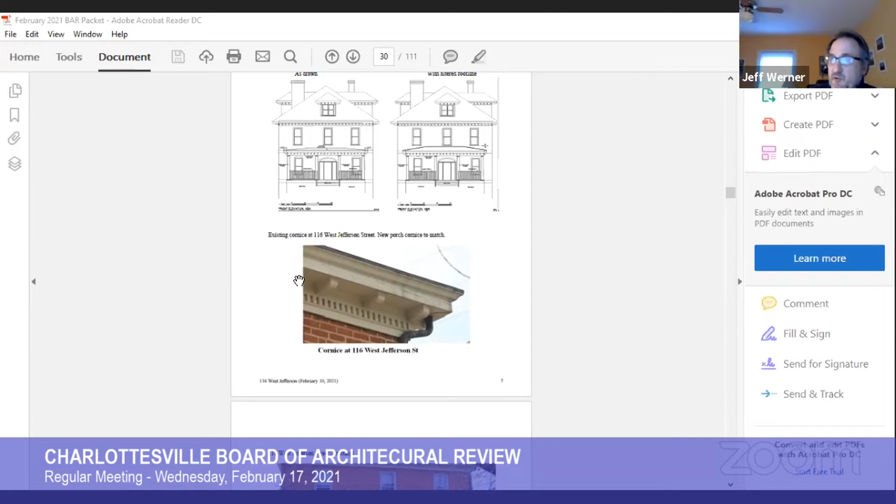Sorry to jump in, but I was just going to walk down through the staff report item by item. Did you want me to jump in now, Jeff? Yes, and I apologize, I didn't add the drawings, but I'm going to send it to Robert so he can put them up there. Is now an appropriate time, or should we wait till discussion? Well, I was just going to walk down through the staff report. Why don't you go ahead then, Jeff? Finish your presentation, or your staff report.

Well, I was basically saying, as far as the discussion goes, if this helps you all, is to work down through it. I know in some of these staff reports there are things like paint color to be determined, flooring material to be determined. This offers a checklist for your conversation with Gordon. That's all I meant, and I just started at the columns at the top.

So when we say, is Gordon okay with these things, there are still a few things here that have some question marks on. And to be clear, Jeff, I see you've got everything illustrated - are these illustrations all tied to one of your discussion points up in the text, or do we kind of need to look at both?

Yes and no, so let me try it this way. I know - stay right there on that image, Robert. So the Scamozzi Ionic - Scamozzi is simply, I don't know what the curls are, rotated at an angle. And in the old photograph there is some ornamentation, and you can see it in this image. This is simply an image I pulled offline.

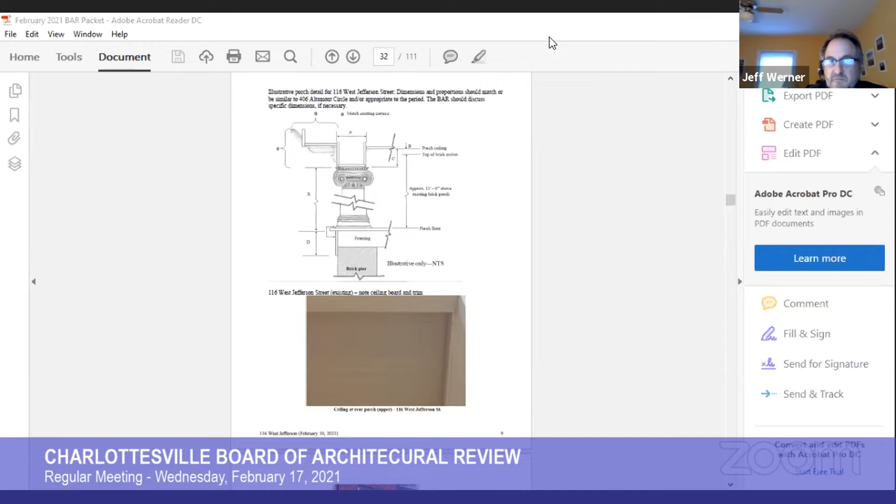Okay, just for sake of formality, are there any comments from the public? Please use the raise your hand feature or press star nine. I don't see any raised hands. Okay, all right, great. So yes, let's do as Jeff has said - let's go through this item by item and make sure we've got everything cleared up.

So yeah, you've got the cornice - they're going to match. I think... go ahead. Capitals - I would recommend that the capitals be a Scamozzi Ionic, similar to what is at the Altamont Circle example that we're looking at, or that I'm looking at.

And Mr. Johnson, you'll be limited to what is available out there on the market. Jeff, I expect, can help you with some of the possibilities for manufacturers that offer Scamozzi capitals, but it'll be your responsibility to match the Scamozzi capital so that it's similar in appearance to this, and also of the proper size for the column and the pilaster itself.

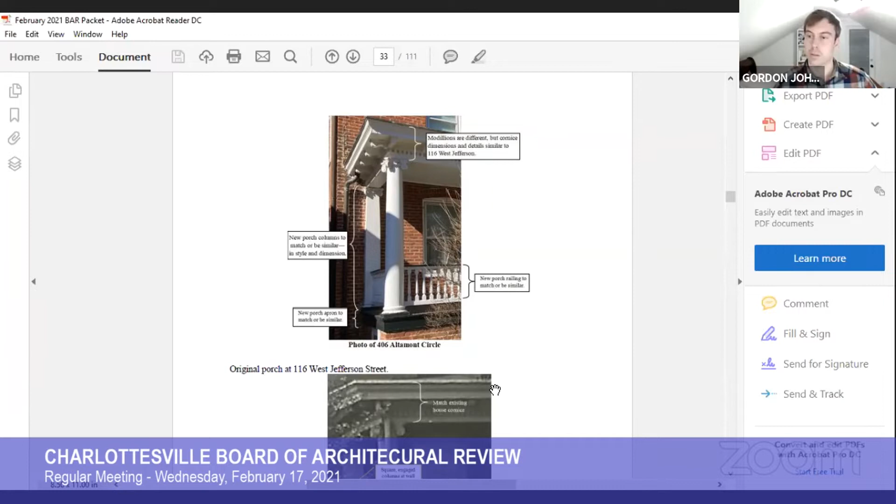Okay. And into that, I would recommend that once you find what you want to use, just give staff a copy of it, and we can leave that up to administrative approval. Okay, if the rest of the board agrees - does anyone have any concerns with that?

And Robert, I just emailed you something if you're able to - give me a sec. All right, this is just to express what we were talking about, not trying to reinvent the wheel. The columns that are on Altamont Circle have - there we go. Okay, so for example, there is the one that has the acanthus, and then go to the next one, Robert. This one simply has that band at the top - that seems to be sort of what's there.

So I think the idea was, at least in conversation with Jody, that there be some sort of ornament at the top, either of that band or with the acanthus leaves, but it just not be plain below the capital. So that's the question for the BAR.

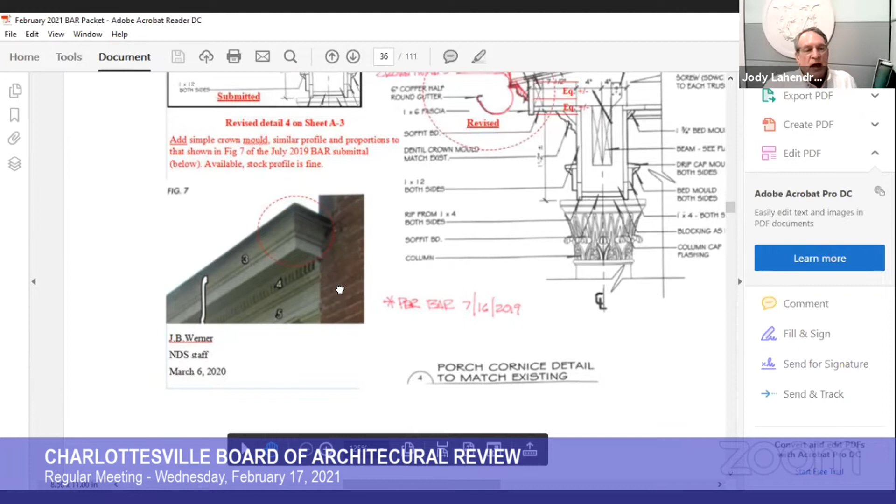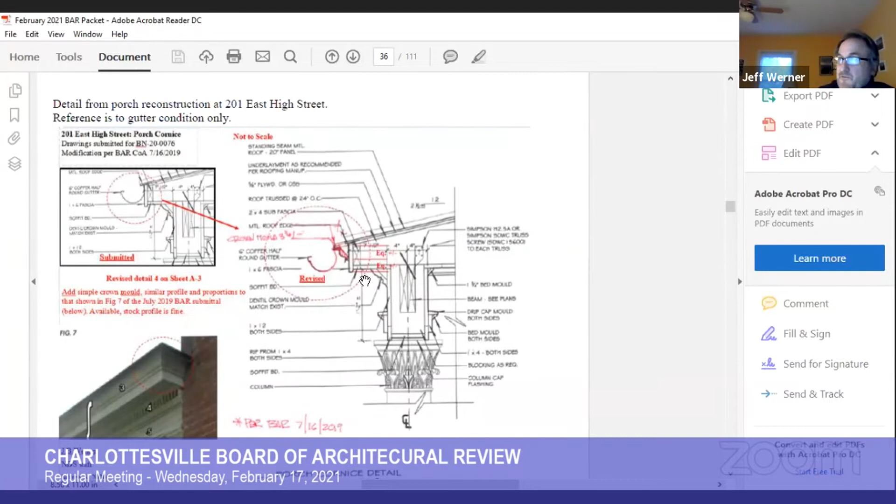The only thing we're referring to here is, don't look at the details, just look at the condition of that. The cornice of the front porch will be replicated, including that piece of crown. And if you go up, there's a rough sketch.

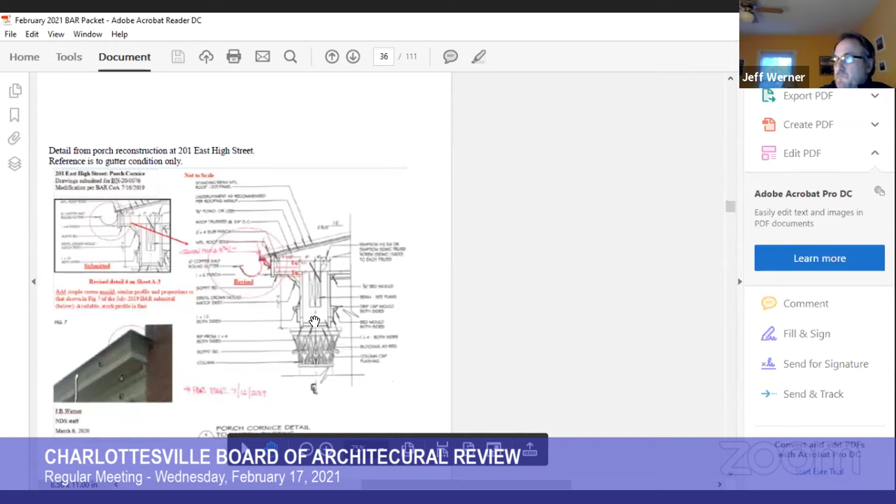Rough sketch photographs. If you go up to page 9, I roughly sketched the cornice and then I dropped it in, so you can see there it is right there.

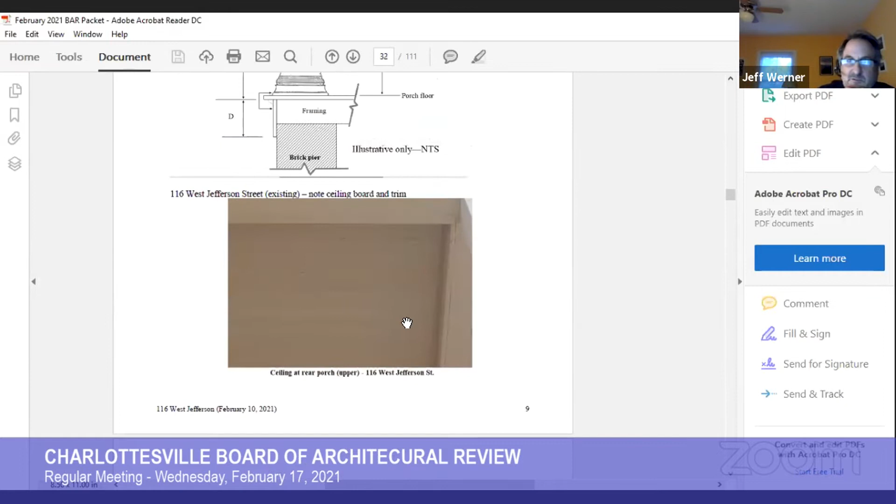Stop right there. So that's the cornice, approximately, that I sketched from the photographs. There's a piece of bed mold, there's the dentil, then you come up, there's a fascia piece with a kind of bed mold that wraps the modillions, and then it comes up to the front and there's another piece of fascia with the crown mold going up underneath the eave.

So in the condition here, replicating what you did at 201, it would look like that, and then the eave-mounted gutter would be suspended in front of that crown. So in fewer words, the goal is to rebuild the cornice as if the internal gutter were still there, but instead of doing the internal gutter, to tack a half round on at the end.

And that crown is matching the crown on the main roof, right? Well, yes, in my best estimate. As long as we say the whole cornice is matching the main roof, from the fascia against the building and the dentils all the way up to the crown beneath the standing seam, including the modillion blocks, all that's the same, and we're adding a half round gutter to it. In lieu of a built-in, right? That's perfect. Okay, good, I'm happy.

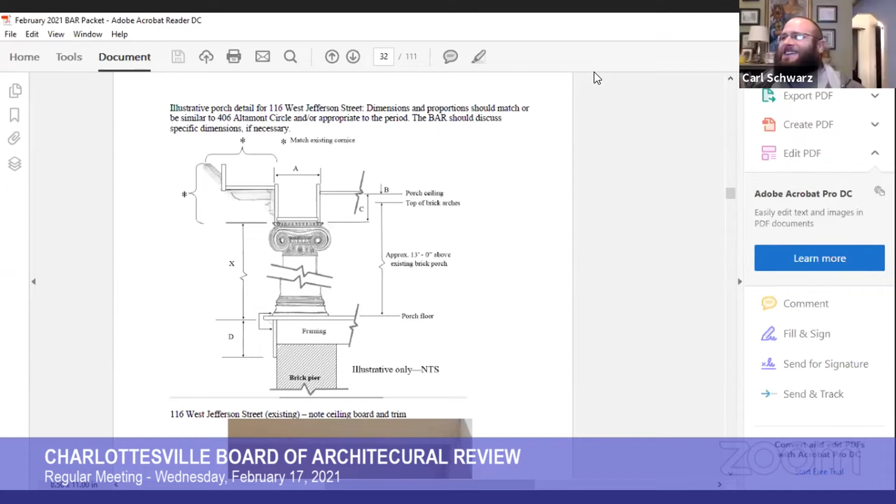Sorry. I have just one quick question, and I may have missed this, but with the upper roof, is that getting gutters on it now too? That currently has built-in gutters that are remaining, that we're not doing any work to. Got it.

So just for the record, and this is really more an opinion on my part, if it were my house and I did this similarly, because the rest of the house is like that, and this is sort of the premier element as you approach the house, my gut would be to remain with built-in gutters, but I'm not enforcing that. I'm just saying that would be preferred, given the quality of the house, to putting the half rounds, just because they've compromised the line of the eave there. But nobody's going to enforce that, I'm just saying that as an opinion.

And while I support that philosophically, practically, there's not a built-in gutter that doesn't leak pretty soon. I mean, we can't keep them from leaking here at the university, and we've got lots of resources. So there are practical reasons for someone not to do a built-in gutter. Yeah, no, I said it's not enforceable, I'm just saying that would be my preference.

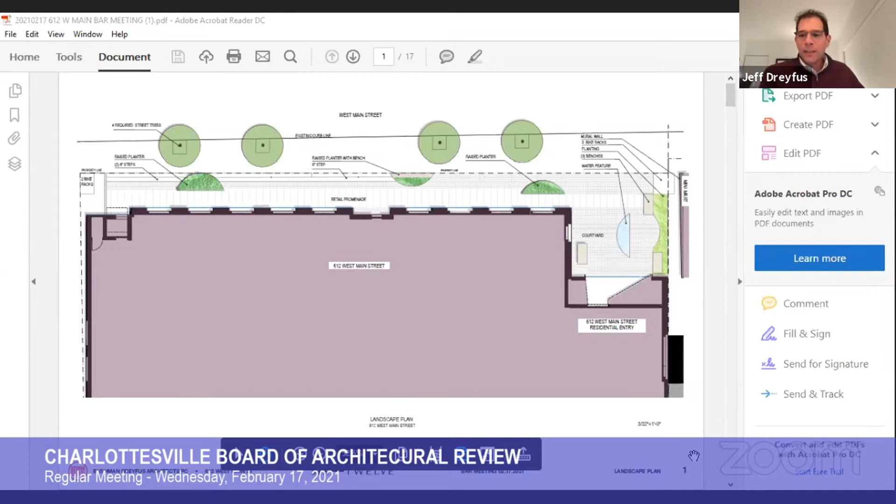Thanks everybody for having us back. We're not intending to wear you out, we're just intending to keep you informed and give you an opportunity to continue to give us guidance prior to coming to you for official approval. I think what I'd like to do early on is hand it over to Anne Pray, who is our landscape architect on the project. But to give you all a very quick overview, the questions that we sent are comments, any thoughts you all have, questions about the landscape and hardscape plan. The building design, the north elevation, the West Main Street elevation, really hasn't changed much from what you all saw two months ago. I'll talk a little bit about some of the modifications we're contemplating there, but then you'll also see both the west elevation and south elevations, so that we might get any input from you all on those as we continue to develop them. So given that, I turn it over to Anne, who might describe our intentions with the landscape and hardscape and how that's been fleshed out.

Thanks guys for giving us some time this evening to talk about the development of the plan since you last saw it. I want to speak about how we're trying to respond to earlier comments about creating pedestrian engagement and making the building more active at the street, while also breaking down the building mass to make it more pedestrian and human-scale friendly.

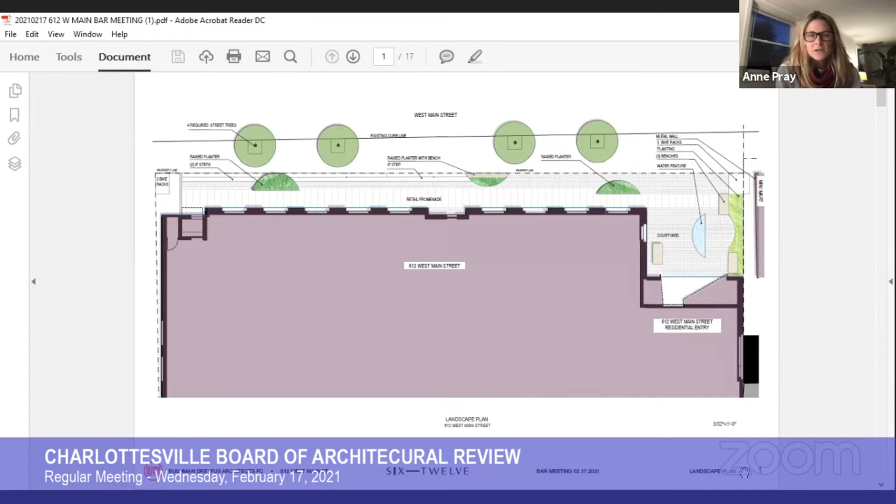This is the overlay plan. I apologize it's very light here, but there are 4 dashed pink circles outboard of the existing curb line.

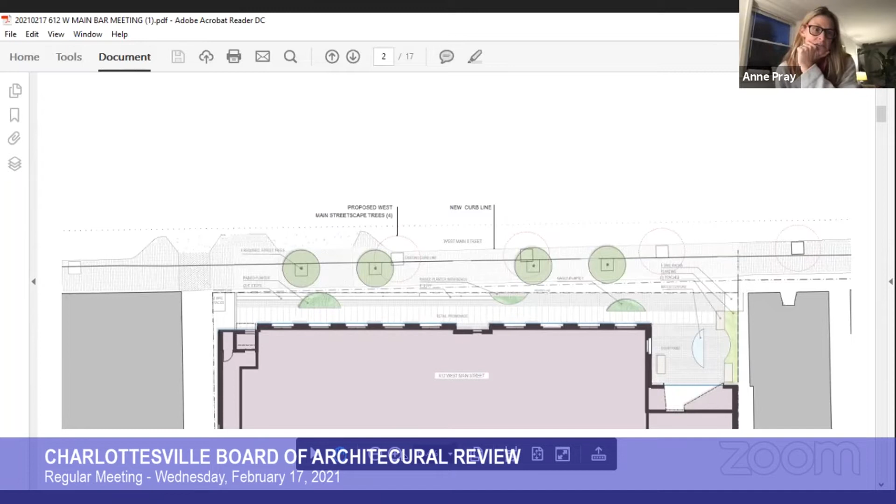Those are the proposed West Main Streetscape trees. In quantity, they work with what we've got and it would just be a matter of coordination. However, the curb line is nearly 2 feet outboard of where the existing curb line is right now on West Main, which lends us to believe they're redesigning the whole street, with parking and different curb lines and curb cuts. So the extent to which we're actually going to be able to negotiate that positioning is kind of unknown. I'd like to figure out exactly what the expectations are from the board as to how we're supposed to negotiate and handle that.

So here you can see an elevation. The streetscape trees, the 4 trees we're proposing, are really going to compete with the overall scale of the building. I think their placement works a little more symmetrically side to side, with each one centered on a major column of the building, whereas the planters themselves bring the scale down to the pedestrian and the body, and work a bit more to create density against the building and your own perception of it as you walk by.

As you look at it, you can see the courtyard space again to the left, where I show the water basin and these 2 stone benches. That's a much more open experience overall. Then as you walk by the first bay, or the first true building, the 4-bay, that's more broken up with the planters and the trees. Again a more open center, and a last third with a planter on the end, nodding back to the balance of the 4-bay building preceding it, with finally the open stair on the end and the retaining wall.

I think it's important to talk about the water. One of the things about this building, which gets a bit more toward the interior, is that it goes from this very rectilinear, clean facade outside, and as you move your way into the building it becomes a really calm, curvilinear, meditative experience. I think what we're trying to do by introducing water is introduce just a small sound, a small nod to, you've come home and it's a little more chill and calm than what you just left on the street. We're trying to set up that choreography from the moment you enter the courtyard.

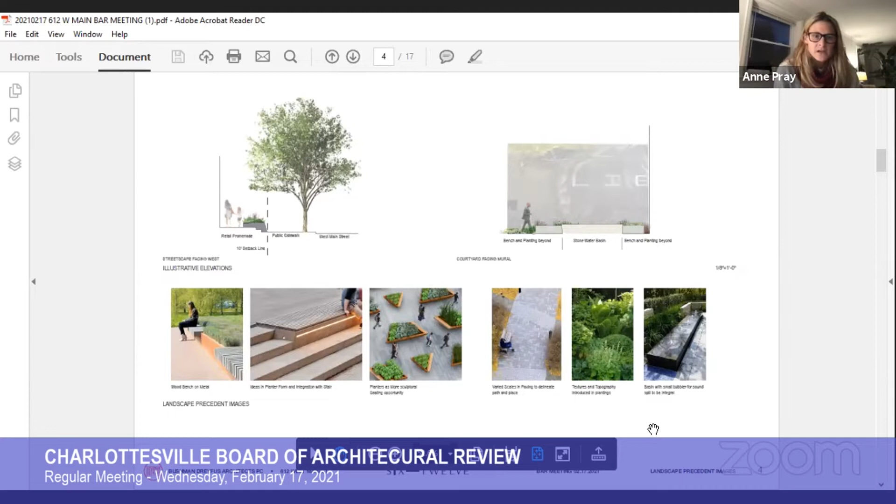The planters themselves, similarly, if you look at the next slide, you can see some different precedents as well as the illustrative elevations above. We're playing with the form of the planter, whether it might have a bit more of a batter to the front face, and how the bench itself could connect in or participate with the planter so that overall they're a bit more sculptural, but also feel like they can be occupied.

The plantings themselves, if you know me at all, I am really into creating planting design as an important part of the piece. I think in this case, looking at the building and the more northern facade, we actually have a lot of opportunity to use plants as texture and form, and create some interesting palettes you probably wouldn't see otherwise along the street. So we'd really be looking to create identity by making the planters as big, 14 to 15 feet long in some cases, and get some good planting in there.

I've got another image there of the paving precedent and different ideas in scale. I think the paving will be very calm, much like the building, but we'd look to use maybe 2 different scales of paving to create a break between path and place. Then the water basin on the end is again just a small nod to something different on the street, introducing that idea of calm as you come into the building as a resident.

So I think the next couple slides actually show this in the architectural rendering, if we want to take a look. Here, it's nice to see the scale of the existing tree, so we get a sense of how big these trees might hopefully become over time.

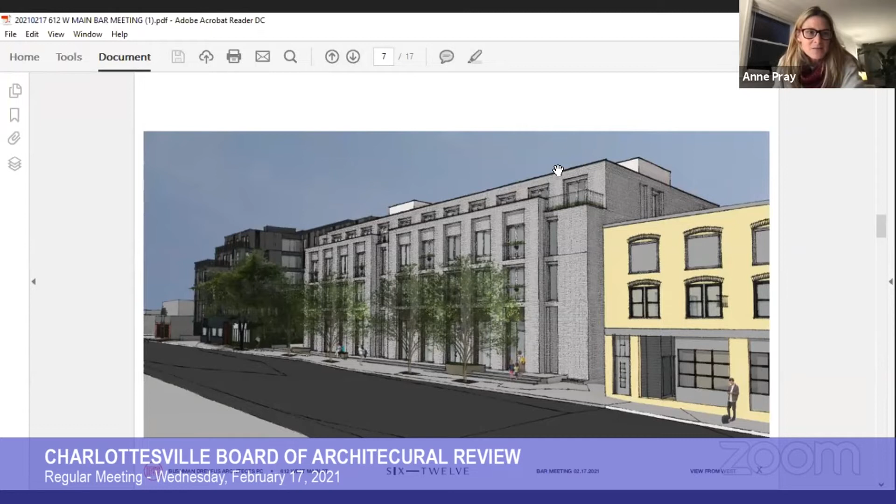I don't know, Jeff, if you have other things you'd like to add, or I kind of blast through things so we can get to discussions, because I feel like that can be more helpful for everyone overall, but those are the pieces I'd share at this point.

The only thing I would add relative to what we're showing here is that we do intend to have greenery options along the railings, the balcony railings. Whether that is owner provided or tenant provided, we've got a long way to work through on that, but we do intend to add that bit of color and texture to the facade.

I'm happy to talk a little bit, if you all would like. I'll talk about the facade development and then just open it up entirely to you all, or if you'd prefer to address the landscape hardscape first, fine with that. But why don't you finish up with your presentation?

Okay, all right. So if you wouldn't mind, Robert, going back just a little bit. As I mentioned earlier, not a great deal has changed. Maybe one more, let's see. Waiting. Another slide back, perhaps. Here we go, thank you.

So we're really looking for ways to quiet the building down. As Anne noted, the interior lobby of the residential entry is going to be very curvilinear. And that is something we are thinking may actually make its way out to the exterior of the building in a very quiet way next to the front door, but not ready to talk about that.

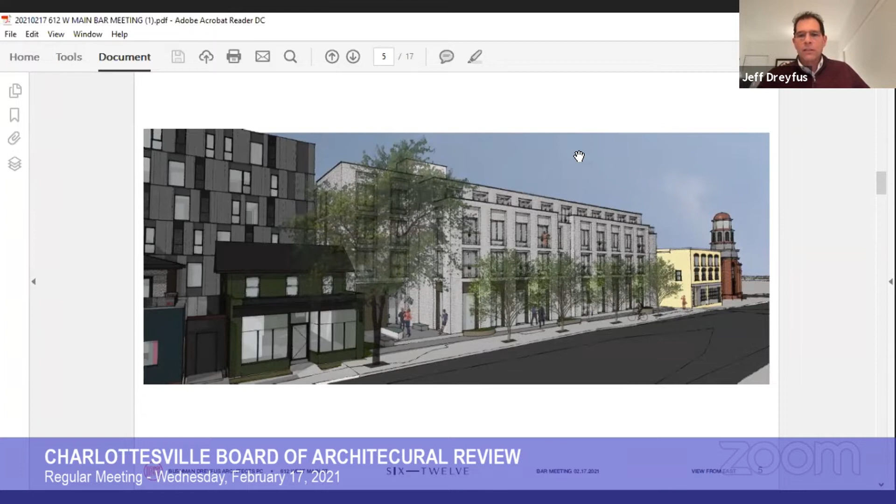But in trying to quiet the building down, you'll see that we've begun thinking more about color and texture since our last conversation. So the next slide, if you would, Robert, does show how we're beginning to think about the particular elements of the facade.

Thinking that we are intending that the north, west, and east elevations will be brick. We'll talk in a minute about the texture of the brick and the hyphens, as we discussed before. But thinking that the upper levels might be white or off-white, we're thinking that the color of the building might be more of a heather brick or a lighter cream color.

It's not going to be white. It's not going to be stark white. We know that much. We've got a ways to go. We're exploring both brick that can be completely painted or brick that has enough color variety to it, soft color that we like. So we'll be back with more on that.

I think what's important to note here is that we believe going with a different color at the retail level, at ground level, helps the building delineate what's residential and what's commercial in terms of scale, but it also makes the engagement with the street different from the facade as it goes higher up into the residential area. So we're liking this.

We don't quite yet know how we want to provide cover at the doors into the retail. That'll be something that we continue to develop.

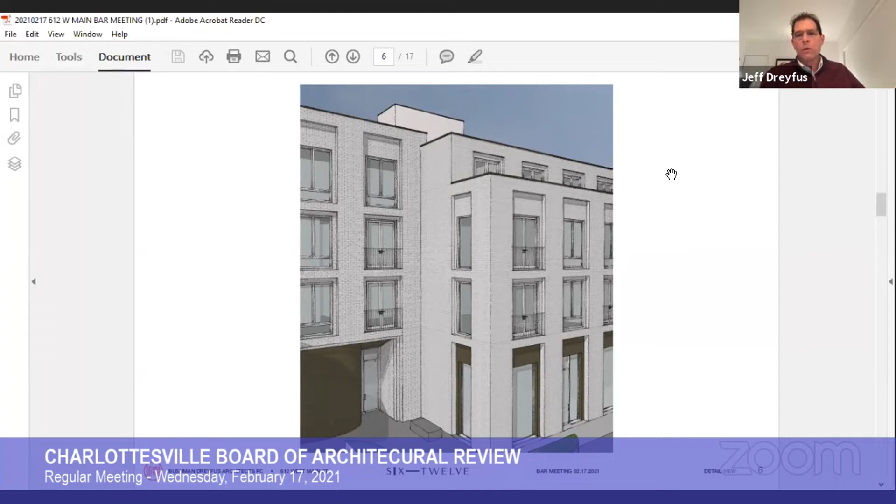We're trying to get away from an initial issue—some of our earlier designs showed a pretty stark contrast between black or dark bronze windows and doors and railings up above, which were similar to what's down below. It was becoming a little bit too checkerboardy for our taste, so we're trying to quiet it down. That's the direction we're thinking of going with colors.

If we can keep going, Robert.

One thing I'd like to note about the hyphens of the facade—and we've got an elevation further on in here—is that we're still imagining the hyphens will be a different texture from the main blocks of the facade that move forward, both the 4-bay and the 5-bay. We don't in any way think the hyphens will be a different color, but perhaps a different texture brick, whether we model the surface or do something with the control joints. We want to make it subtly different. They step back and step down a little bit, but we're trying to keep things related, quietly different from one to the other.

Here you can also begin to see that the lower level, the darker color on the retail level, does what a number of buildings on West Main Street do, which is call a distinction between the retail level and the residential levels up above, including on the Holsinger building right there on the right. There's a distinct line drawn between the ground level engagement and the upper level residential.

If you wouldn't mind, Robert, the next slide.

Here we're beginning to talk about what the rear elevation will be. This might be a little hard to make out, but on the lowest level, we have 2-story studio lofts behind those tall double doors. Those are probably Juliet balconies that can be opened, and they speak to the height of that floor elevation. As you all know, on West Main Street we're supposed to have close to a 17-foot tall first floor, so we're actually taking advantage of that to provide loft units on the back side of the building with living down below and a sleeping loft up above.

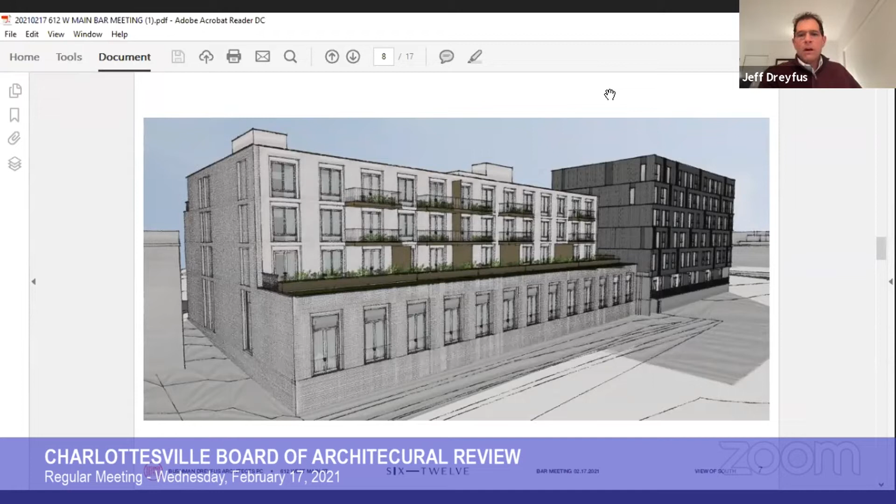On the next slide, I think, Robert, might be elevations, full elevations. Here you can see the elevations as they stand currently, the hyphens that we've discussed in the previous discussion, in the middle and on the far right.

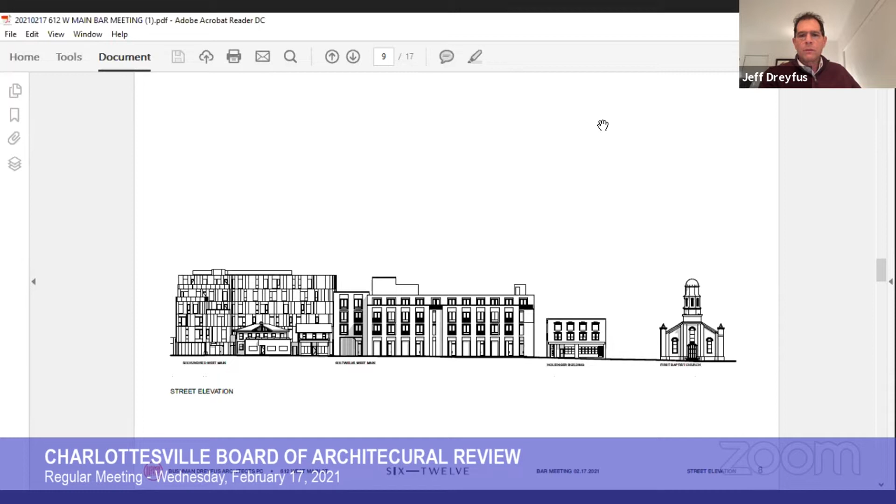Color coding only to show some different texture on those hyphens and also on the residential block that sits back from the building, sits back from the street. Then the next drawing should be the west elevation, I believe, the south elevation.

As I described, the upper balconies on the top two floors, but then terraces on that third floor level just above the studio loft balconies. And then the next elevation.

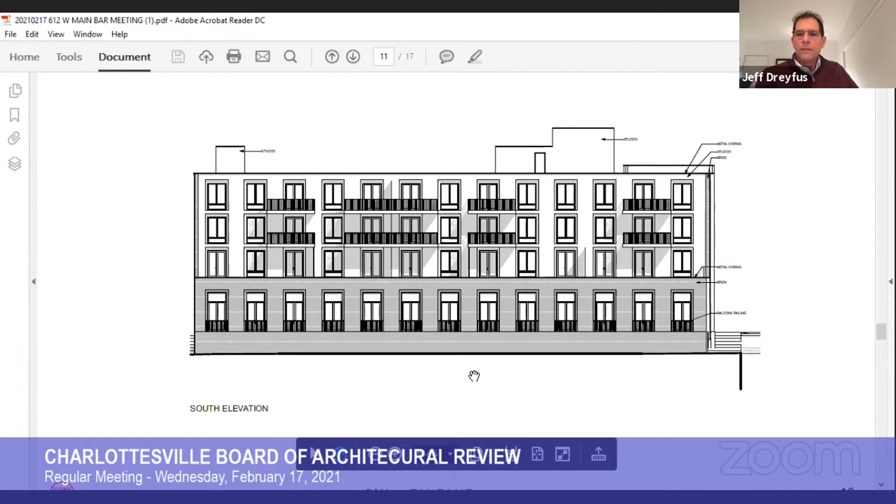Trying to take the motif from the north facade on the west elevation there on the left, take the motif of the openings and sizes and continue that to give a bit of order to that facade, which is on the alley adjacent to the Holsinger building.

The larger windows are all windows in residential, at the end of residential corridors. The two smaller windows there on the far left are within units, to allow those to be a third bedroom.

And then you see on the far right there, the elevation facing the courtyard of 600 West Main Street. The mass of the building of 600 West Main is dashed in the very dark line there on the left of that drawing. It's a very narrow courtyard, as you probably are aware.

At the end of that courtyard would be doors leading into the lobby of 612 West Main Street, so that the tenants of both buildings will have access to the courtyard and to the lobby. And if there is in the future a rooftop amenity on this building, the tenants of the adjacent building could enjoy it. I think that might be the majority of it.

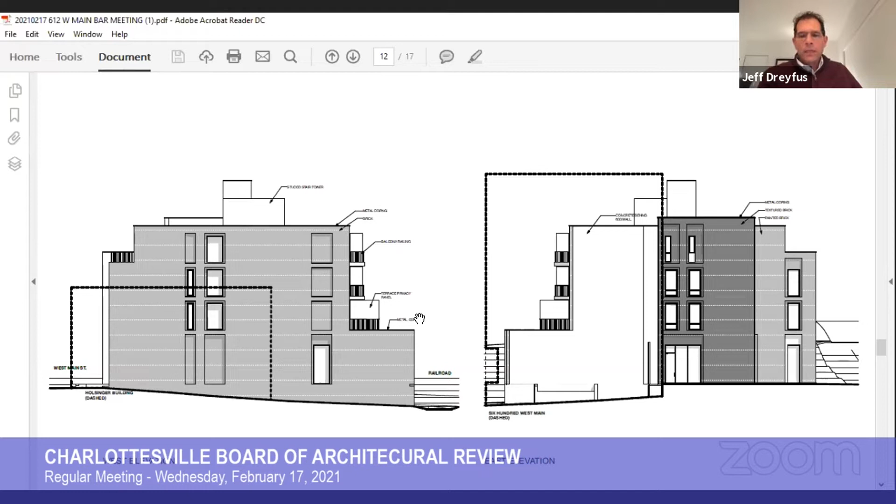I think we've included some of our previous slides that showed ideas of ways that we can achieve different textures, different openings of the windows. Maybe the next slide, Robert.

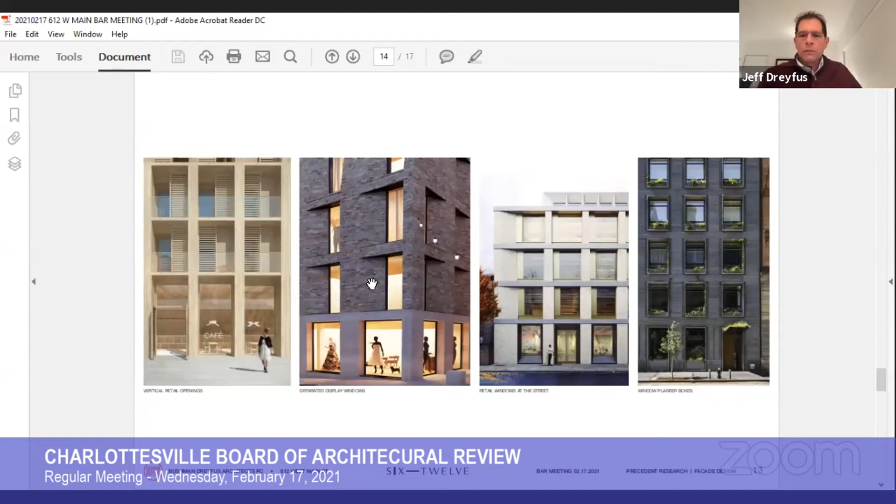Thank you. The image to the middle right, the light facade, is not unlike what we're discussing - perhaps lighter color for the brick, but a darker color for the retail openings, being different from what's happening on the residential up above. I think that might be it.

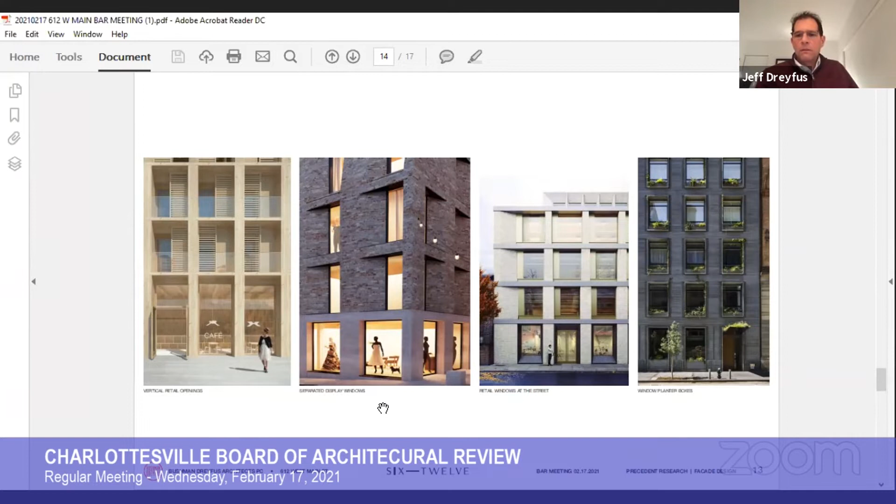Robert, these were the previous drawings. I don't think we need to go there unless we need to compare and contrast.

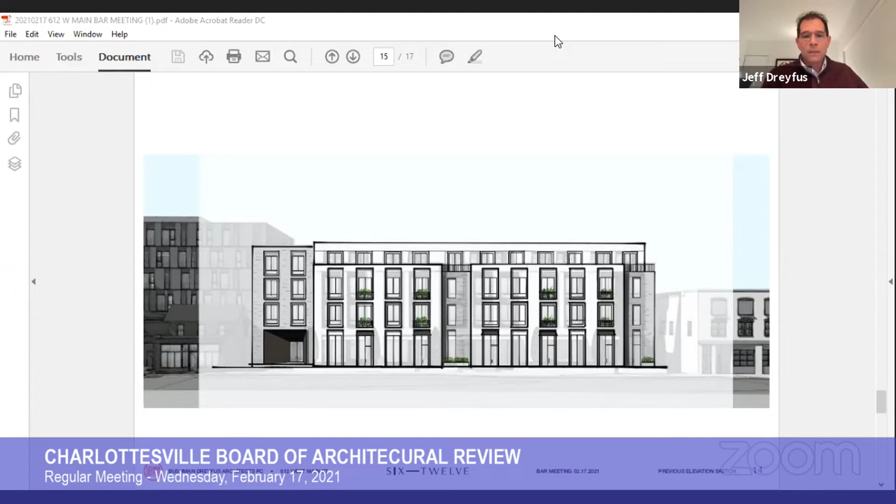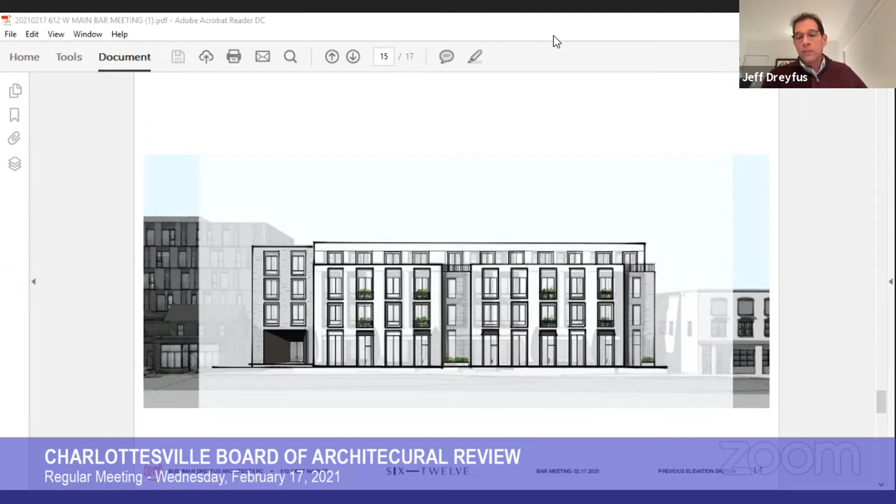So as I mentioned in my notes, we'd appreciate any and all comments on the landscape, hardscape, especially as it relates to what Anne is showing, and importantly, noting that the tree locations relative to what is shown on the West Main Street streetscape project. And then also any comments you have about the facade development, any of the elevations, the colors, materials we're contemplating at this point, as well as stucco on the south side of the building.

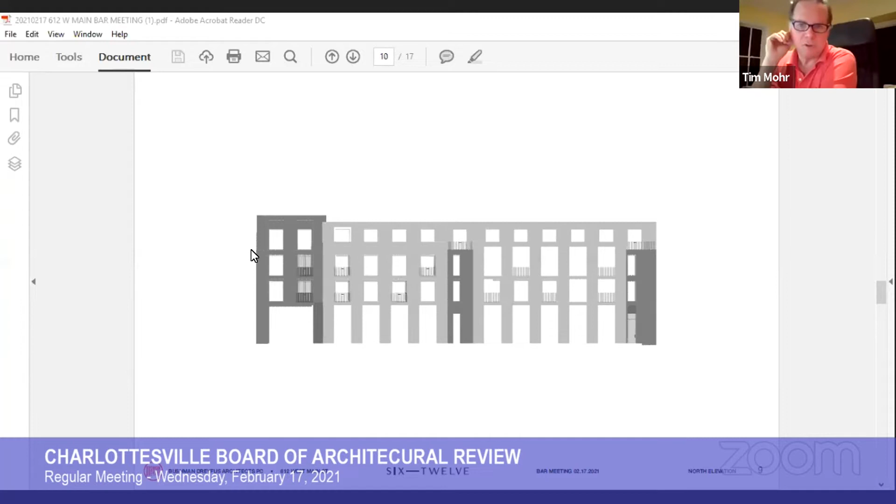All right. I was wondering whether it was something that matched the height of the planters or not, but I guess that's not the case. Yeah, I don't have it matching the planters. I've just kept it pretty low profile.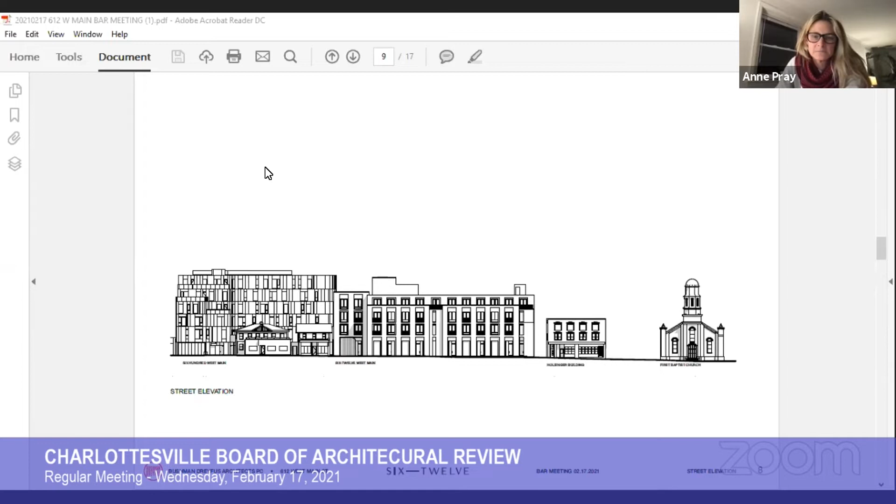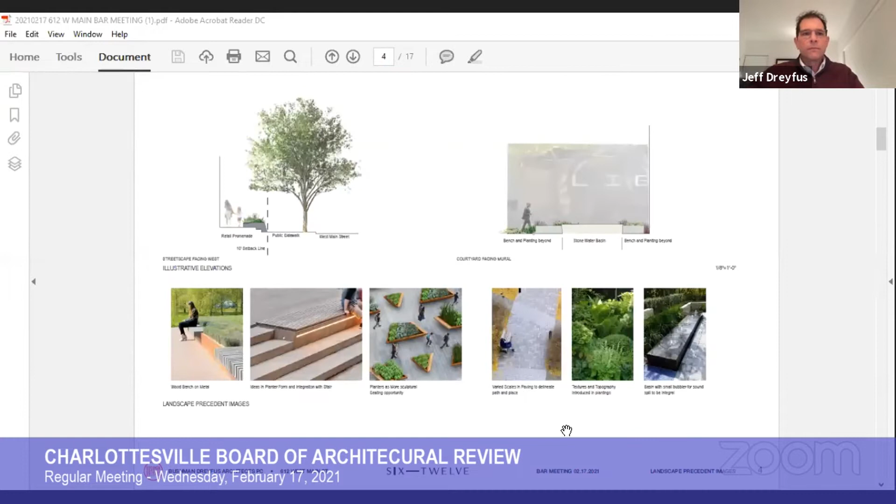Robert, that's probably page 3 or 4. Page 7 of - yeah, it's on the end there on the right-hand side in that elevation you're looking at. Concrete retaining wall.

Right, so I was looking at the rendering, and so - oh, sorry. It's okay, it probably didn't make it to that, Tim. That's what it looks like. That's what I was wondering. That's what I thought, yeah.

That is the move-in door for the building for all of the tenants, so yes, there will be a curb there. There will be safety factors so nothing goes rolling off that end. I was thinking more it just seemed like the resolution - it looked like in the plans there was something more of a wall there. It was just a resolution question. It makes more sense that there's a wall there, so yep, which there is, so moot point.

One of the reasons too is that initially we thought about wrapping the stair back to the corner so you could really approach the building from that corner, but we need the space for the bike racks. So we basically ended up with the retaining wall to cut in that space for the racks. It's a good question because honestly we have to utilize every little inch to create all these little moments. Also, wrapping the stair didn't make a lot of sense because we'd be inviting people to step into a private alley, so this was really to direct people out toward the street.

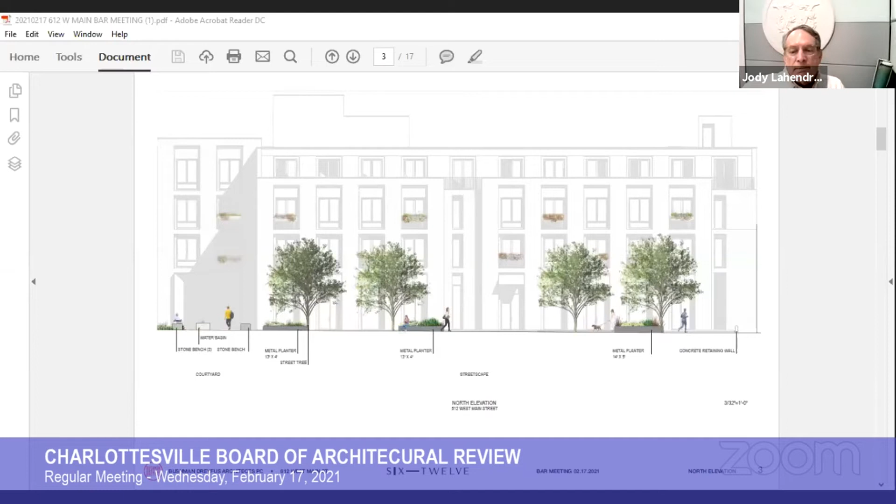Well, I'd like to step in about the north elevation. Robert, could you go to page 10, please, of the architect's drawings? That one—I'm sorry, page 9.

This looks better to me than what I'm hearing. It is what's actually meant, in that the recessed planes of the hyphens are darker and obviously more recessed, but the darkness is a symbol just to indicate some kind of texture. And what I'm hearing is that the texture that's desired at this point is subtle and not distinctive.

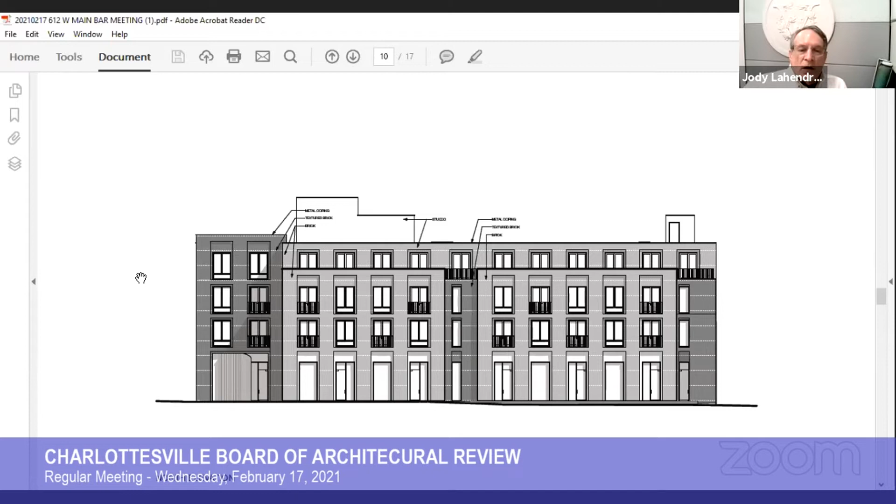I would prefer to see something that's more distinctive in the difference, because I think this reads as we had intended, or stated all along, that we're trying to mimic the scale of the individual historic buildings that are still left on this part of West Main and that were here originally. That's my biggest worry, my concern about this elevation.

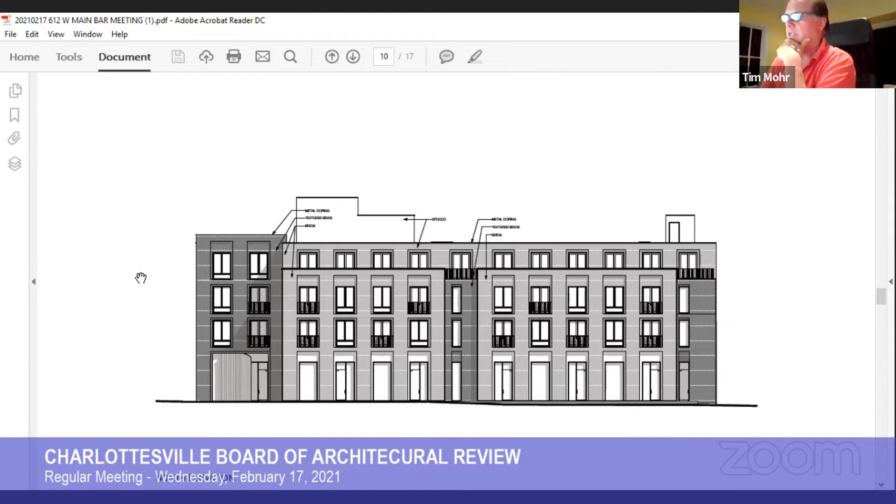Well, I appreciate your bringing that up, Jody. So I have a follow-up to that, actually. It seems to me like one of your end elevations, which are quite asymmetrical, and as a result seem to have a lot of surface development. What page is that? Page 11.

There's a sort of a playfulness in there, and it also harkens back to some of those images you showed us from some of those urban buildings with the multiple planes. I can't remember—let's see your precedents.

Your precedent images on page 13—I wonder if you really start playing with the level of detail in there, so it actually catches more shadow, is more idiosyncratic, and plays a different architectonic game than the quieter, very rectilinear facade. That, possibly combined with darker materials, would also catch more shade and shadow. I think you have some clues in that east elevation that might enliven and at the same time distinguish those punchbacks.

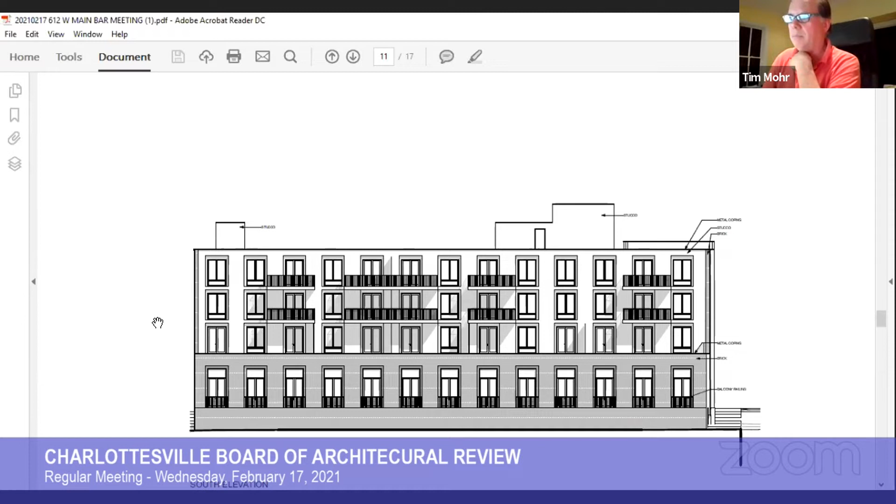And then while we're on that subject, I'd like to just quickly slide over to the top section of the residential block on the north side. I could see doing that in a completely different material, like glass, where it's much more of your belt line for your parapet running around, and that whole upper piece reads as something that is truly set back and perhaps much more modern and translucent.

But I think that would again kind of help the read of the scale, and also—in a way the brick on top of that feels a little heavy to me.

And then I'll slide around to the very back. I could see putting some brise soleil over the upper band of balconies, that starts reading as more porch-like, and softens that facade a bit on the south side. That would start to break it up vertically without having to modulate surfaces much, but it would give you a scale breakdown, because those would start to read as sort of somewhat tower-like.

So that's my 10 cents. Okay, thank you.

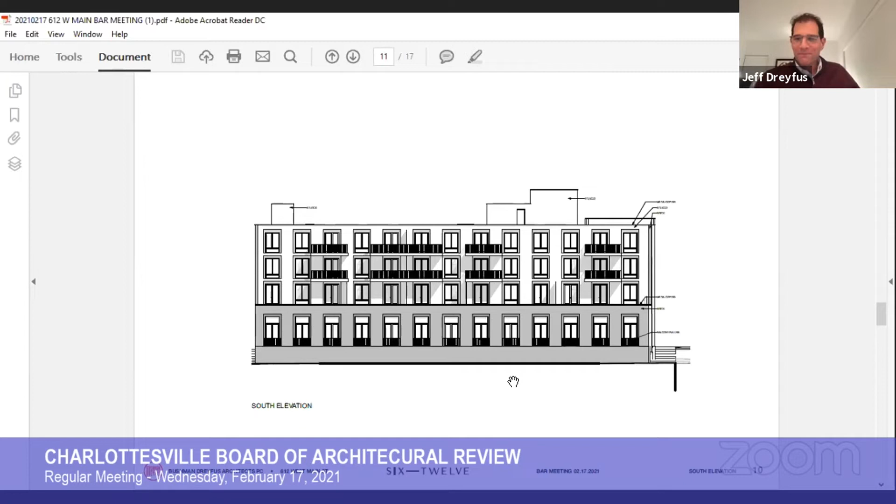I too am a little concerned about the subtlety and the thinness of the plane of the north elevation. It's not so much the elevation, but more the plan and the perspective views that would come from it. I'm concerned because I think almost every view from the pedestrian's point of view, or from driving down the road, that this is really going to look like a long building, because the plan changes are so subtle.

As mentioned in the last meeting, the addition of those balcony railings, stepping that height down, the introduction of some different texture are good techniques, but it's really riding on that line of whether this is meeting that SUP recommendation that the mass is breaking down.

So it might be useful to include some more oblique perspectives in the package in the future. I think that's how this building will mostly be seen.

And if the intention is to truly have the brick and the textured brick so similar in color, I wonder if a more radical technique, like making one of the bays the textured brick, might be worth considering. But I just continue to look for more depth in the facade, and I just worry that it keeps getting thinner and thinner.

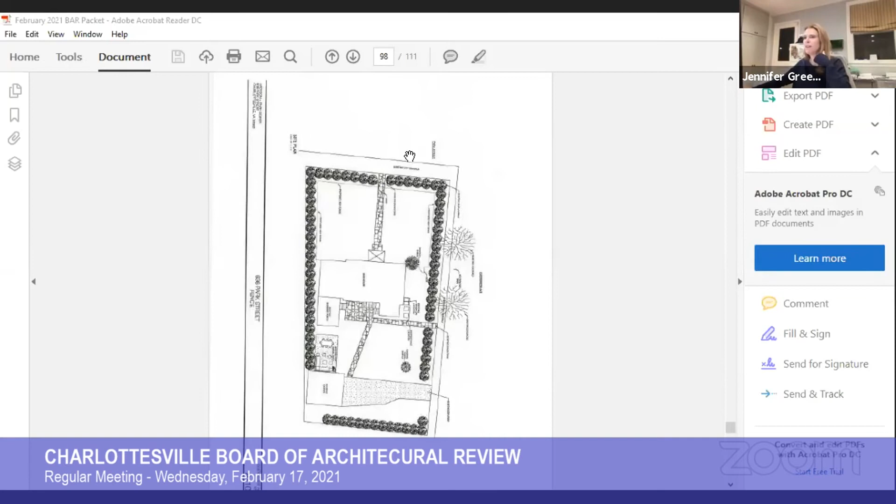Yeah, so if they go to the next page of that. Okay, yes, so it's hard to see because this is a bit distorted, but the one on the left, the wood fence, is the one we prefer for a few reasons. One, we plan on eventually doing something to our backyard, and we want a privacy fence in our backyard, so we would like those two fences to match. This fence, the photo that you showed of our house, the front of our house, is a really old one, that's when the box was there. I don't know if you've driven by our house recently, but we have skip laurels out that are probably 14 feet high, so the fence is not really going to be visible.

Our neighbor next door at, let's see, there's a 632. I don't know if you can see that. That's not going to work, but that's the house you reviewed a couple years ago, so very familiar with it.

Yeah, so that guy has a wooden fence exactly like this. The apartment two doors down has a wooden fence, it's a more modern wooden fence, they use it as privacy for their patios. And then on the corner of Park and Farish, they also have a wood fence. Theirs is technically wood and stone, which is a little more fancy, but we really are hoping, for many reasons, we would prefer the look of the wood. It's more cost effective, and just feel like it would be more preferable to our style.

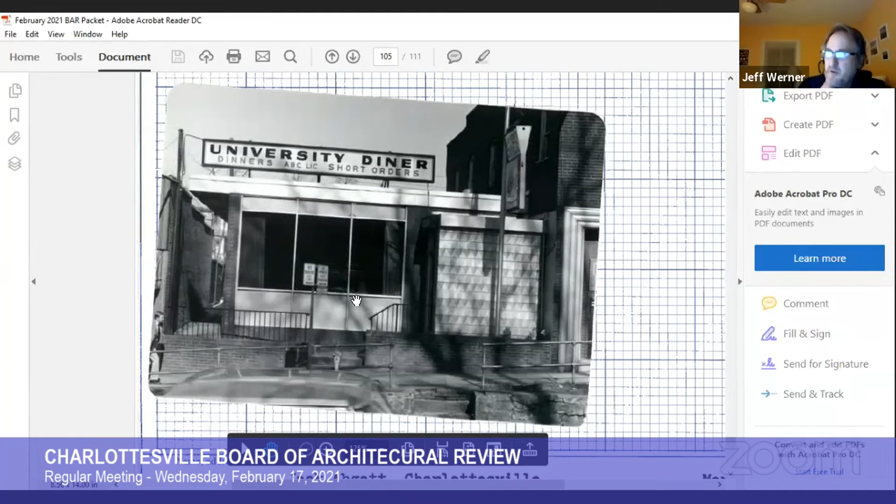With a whitewash, and they're willing to comply with whatever recommendation the BAR would have on that. And then there is some of the non-brick that they'll be painting in a dark gray color. We recommend proposal or approval with some conditions.

While design guidelines discourage painting unpainted masonry, the building's relative lack of architectural distinction and recent construction date merits some exception. Typically if it's a brick building prior to the 1920s, 1930s, simply because of the nature of the masonry, you don't want to put paint on it. So since they're a relatively contemporary building, that's not a problem with the paint as far as mechanical properties of the brick.

Aesthetically, the owner wants to sort of brighten this up. It's got a little bit of a kind of used, back-in-the-corner look, and that's kind of the intent here. So we recommended approval with a strong recommendation that the brick and mortar be repaired prior to any whitewashing, and that we recommend they use a whitewash, a mineral paint suitable for painting on masonry surfaces. And with that, that's what I had.

If you all had any questions for me, standing in as the applicant. We have a total of 0 attendees from the public, so I don't think there's public comment.

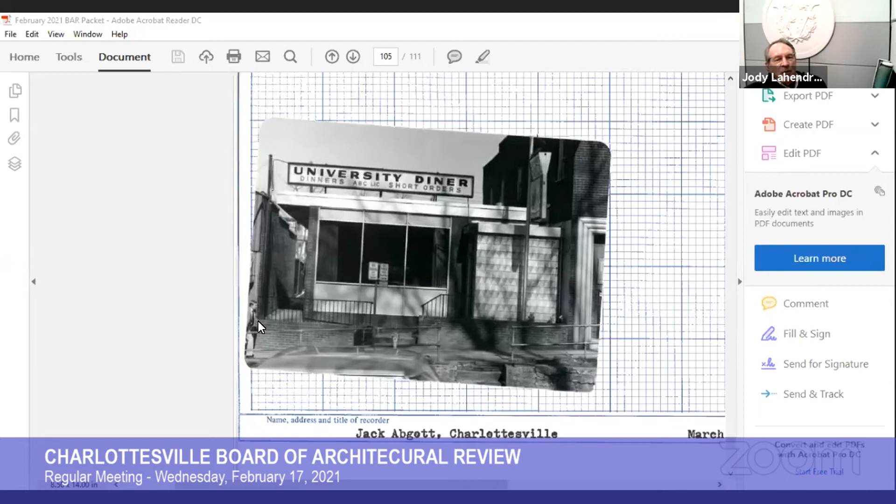That's actually where the mistake is—that they painted that block. Yeah, it doesn't look at all the same, Jody. I agree with you. I love the look of that photo for the landmark. They also got some plantings in front of that block now that screen it, which is unfortunate. And if the purpose is to make this stand out, it seems to me there are other ways to do that besides just painting the brick.

Cleaning it. I mean, the sign on the original University Diner could almost have been a character-defining feature. It's not there anymore, of course. I wonder why they haven't put a sign back up. It seems like, I mean, you could. Probably too big for the signage ordinance. Yeah, rooftop signs are frowned upon.

I just wonder—I think the elegance of that little facade is in its proportion and its composition, not in its... there's not really, I don't know that the brick... I don't think that giving it a whitewash really changes that. If anything, it might make it a little bit more legible, given all the stuff that's come up in the meantime.

They want to freshen it up—that was the word they used, and I don't think they're looking to spend a lot of money. I'm looking at the street view image, which is good. I don't know what in the world is on the roof. So put some interesting plants in, do something—planters, put some colorful umbrellas out in the front. Are the planters going to change? Nothing was said about that, and this is where...